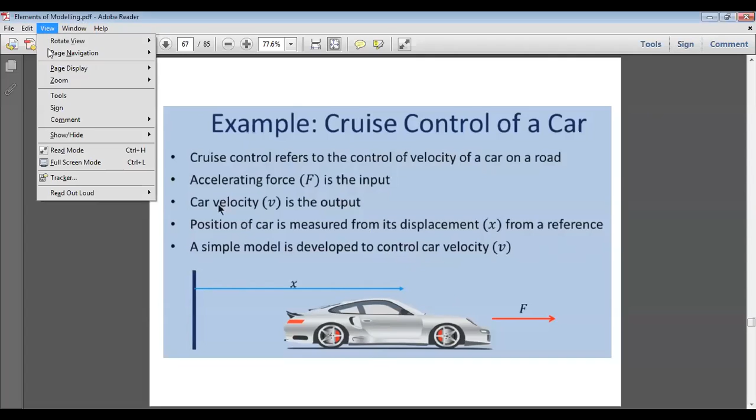Can you see a car here? Can you see a car? Are you able to see this slide? Yes sir. Another example: a cruise control of a car.

That means I want to control the speed of a car, let us say. So here I have a car, and as part of this control system, my interest is in evaluating the velocity. Now, when we say mathematical modeling of the system, let us recapitulate the steps we adopted.

First, we define the objective. What is the objective here? I want to measure the velocity of the car. I want to have an equation for the velocity of the car when some acceleration force F is applied. Let us see that in this particular diagram.

Here, F is a force generated from the engine, causing some kind of motion. Let us say, taking home as a reference, the car is moving. Now the car is at some position, which I am taking as displacement. In this diagram, the physical system called car has force as the input and displacement as the output, or I am interested in measuring the velocity.

Now let us write the mathematical equation for this mechanical system using this free body diagram. So the steps are: first, this is the original system. First, let us have a structure for this. When you see a structure, it looks something like this. Are you seeing this diagram where we are modeling the cruise control?

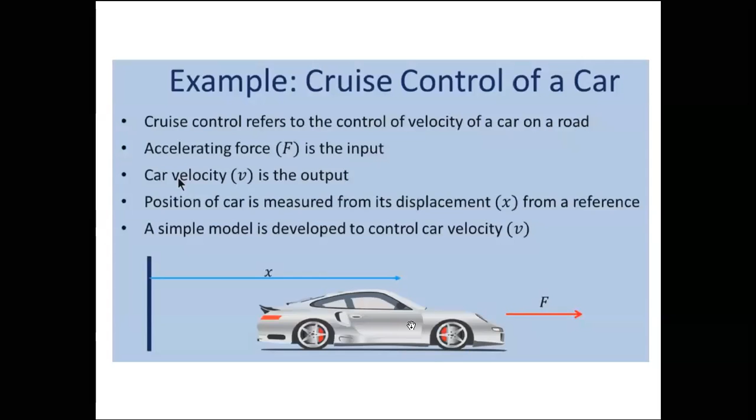This mass and the friction on the road or this air you consider, and let me represent here. This is my car mass equivalent. That's why it is represented with M. And subsequently, it is having some resistance, opposing force. So B is drawn. Now force is applied; in what direction is force applied? In this direction.

Now let us recollect the sequence of steps. If you recollect our earlier discussion, first we have to identify what is the scope or purpose of the model. Here I want to have an expression for velocity of the car, and subsequently I need to construct a model which will be giving the velocity of the car, which I can use for controlling.

Next, define the boundaries. When I say boundaries, what is your interest in that particular physical system? Here the physical system is the mechanical system. So here, what is your interest? I want to control the speed of the car, and there is some road. This is what the boundaries are. Road forms the part of the environment.

If you are expanding boundaries, what is going to happen is more and more forces, and in turn more and more elements are going to be added to that particular system, and in turn the system may become complex. So it is up to you to what extent you want to study the system. Based on that, the boundaries are going to be defined.

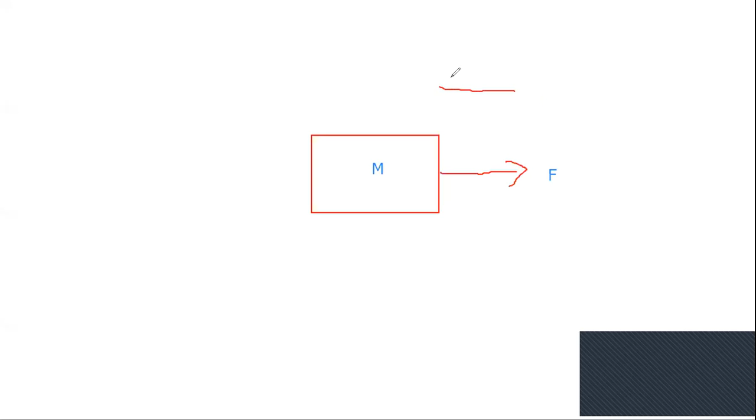That opposing force will be in this direction. What is this opposing force? This opposing force is because of this mass. That particular opposing force can be derived from Newton's second law. What is Newton's second law? F equal to ma, that is mass multiplied by acceleration. But what is acceleration? Rate of change in velocity, or rate of change of displacement.

So here I can have the expression d²x/dt², and its direction is in this particular direction. Next element is, we said that there is some friction here. At this place we have some friction, and that friction also opposes the force whatever you are applying. What is that friction? That is represented with your damping factor B.

Now here the displacement is x. Here you are having the displacement x, and some kind of opposition that is given by the mass, that is given by d²x/dt², and it is providing some friction. When you say the frictional force is proportional to the velocity, if you recollect, for the damper it is F equal to B into dx/dt.

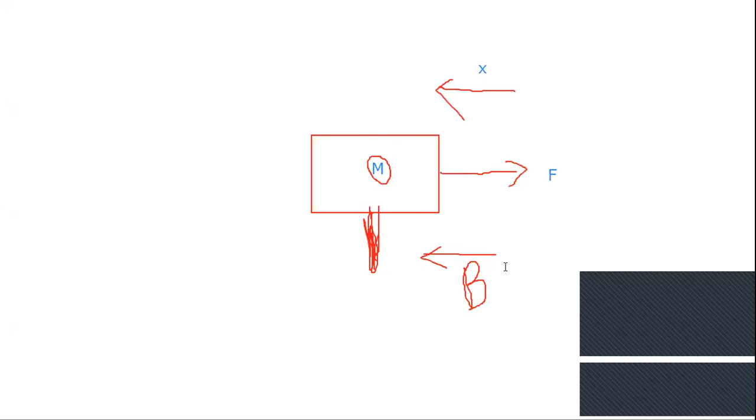Now let us come back to our earlier discussion. So if you see here, here I have mass and here I have friction, and if you write the equations, the first force is acceleration, that is given by m into d²x/dt². And the second one is frictional force, that is given by B into dx/dt.

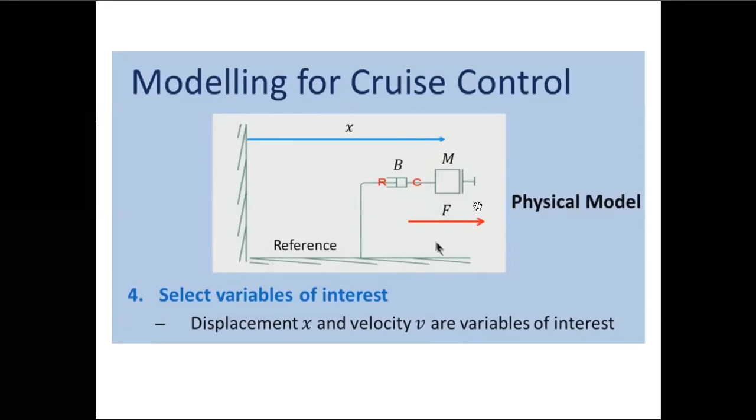So I can write F minus F because of M minus F because of B. Here, instead of M, it is represented as because of the acceleration: F minus FF, that is friction, minus FA equal to 0. This is the mathematical representation of a simple system.

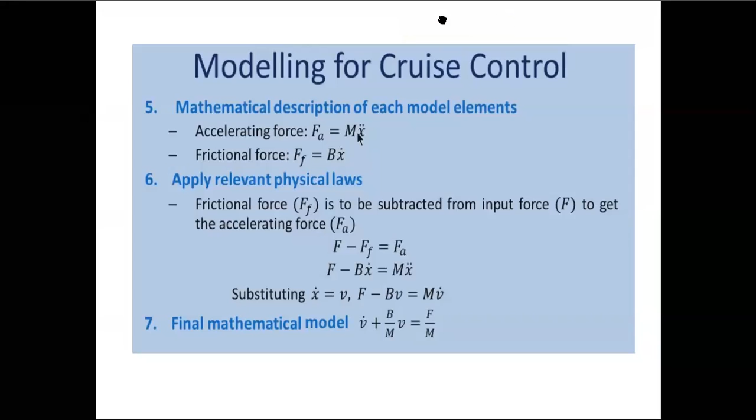I am pausing here. If you have any doubts, ask me. Is the process clear? Hello? Are the steps clear? Ajay. Ajay, unmute. Yes, sir. Yeah, steps are clear. Okay, sir. Clear. Sai Teja. Yes, sir. Is it okay? Yes, sir. Sivajyoti. Any doubts here?

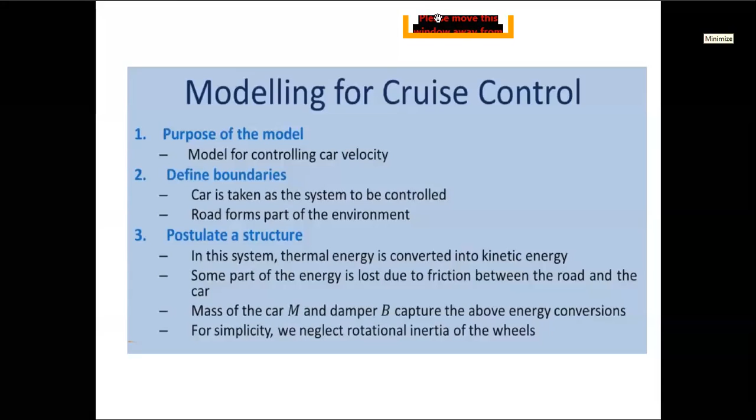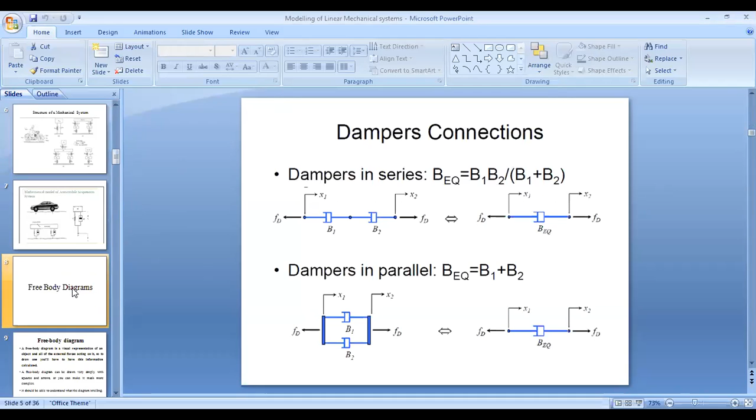No, sir. Okay, let us go back to yesterday's problem once again, so that we will establish more confidence. One minute. Can you see this slide? Mathematical modeling of mechanical systems. Are you seeing the PPT? Hello? Okay, thank you. Sir, in the previous problem, you explained applying relevant physical laws.

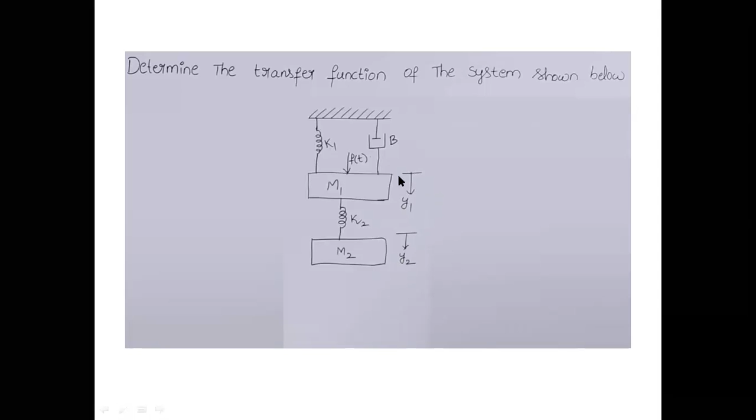Let me mark here. Let us say this is my 0 position. From here to here it is y1. From here to here it is y2. That is the meaning of displacement. That means this object has moved something. That's what y1 and y2 refer to. You need not take exactly this as a reference. From the initial position it moves some displacement.

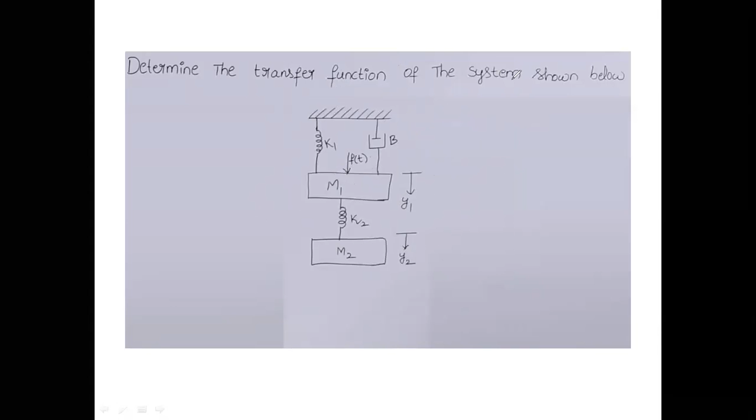Now, if I want a transfer function, first I need a mathematical model for this. For the mathematical model, first you identify masses, or the places where you have displacement, m1 and m2, and subsequently you write your free body diagram for mass m1 and mass m2.

What forces are acting on m1? You are pulling this down, that is f of t, whereas because of the spring it is pulling up, so that direction will be opposite to f of t. Similarly, as it is hanging down and this is pulling, the mass also will cause its force in the upward direction. Suppose you push a person, he tries to stay standing, so he will be resisting that force. So the force because of the mass also will be opposite to f of t.

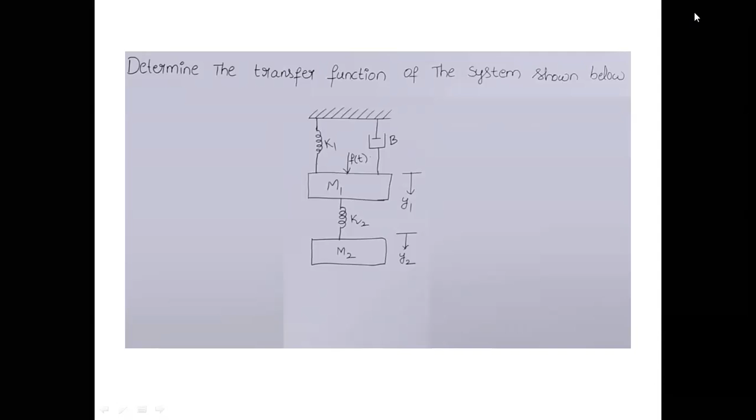Now let us see that in the next slide. If you see here, f of t is away from this body, whereas what is fb? Because of damping, it is in the opposite direction to ft. Similarly, what is fk1? A spring between the reference and mass, that also will be opposite to ft. When you pull, the mass will be opposing, so its direction is also opposite.

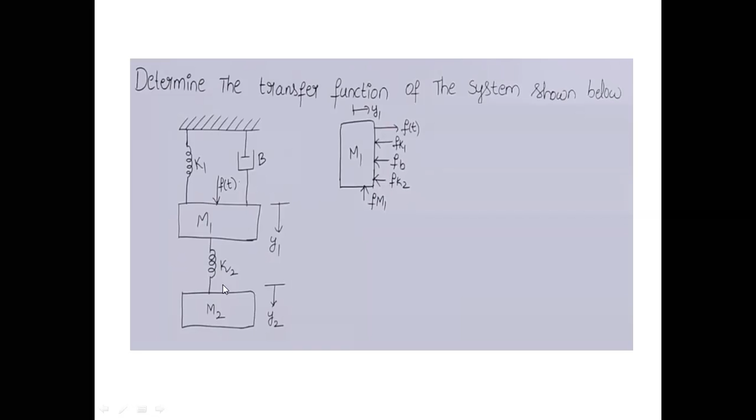Here fm1 is placed below, but even you can take it here and it will be inside. Coming to this, there is a spring between m1 and m2, some effect will be there, and that effect is shown here. Now let us have the equation. fm1 means due to mass, d square y1 by dt square. What is fb here? Damping depends on velocity.

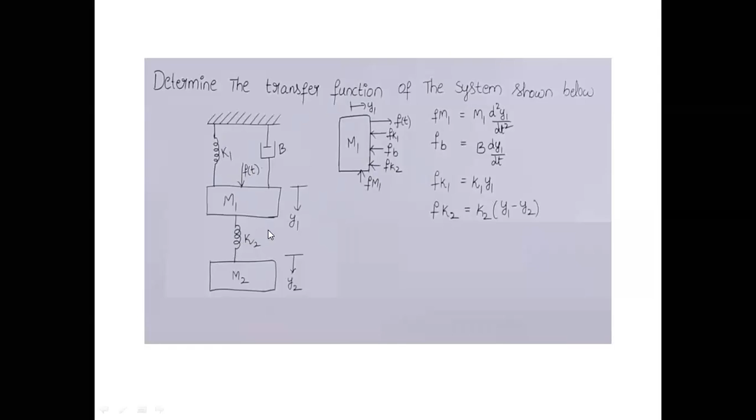In this spring, one end is rigidly fixed. In this side, this spring is not rigidly fixed. The meaning of this is, see this diagram once more. Give me 1 minute.

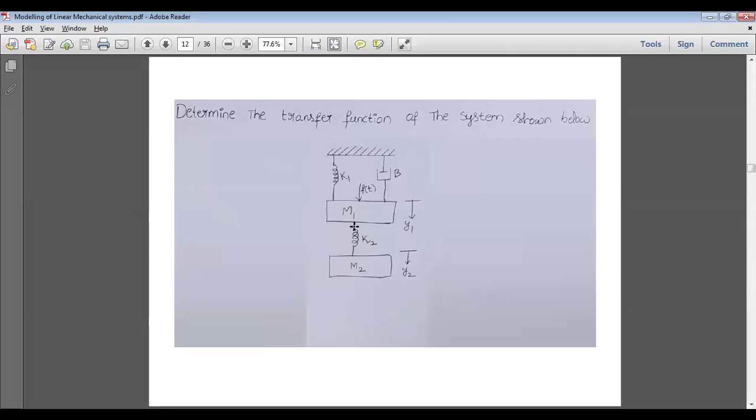Did you understand the difference? In this case the spring is tightly fixed at one end, the other side is free. But in our problem, if you observe here, 1 minute. If you observe here, it is tied to both. That means the spring can move. It can give some force. Is it okay? So here that particular effect is taken as K2 into y1 minus y2, this displacement.

Now let us write this D'Alembert's principle. D'Alembert principle says that the forces acting on a body and the forces resisting the motion of that particular body will be equal. That means f of t will be equal to, what are all resisting here? F of t will be equal to fm1, fk1, fb and fk2. That's the equation we got here.

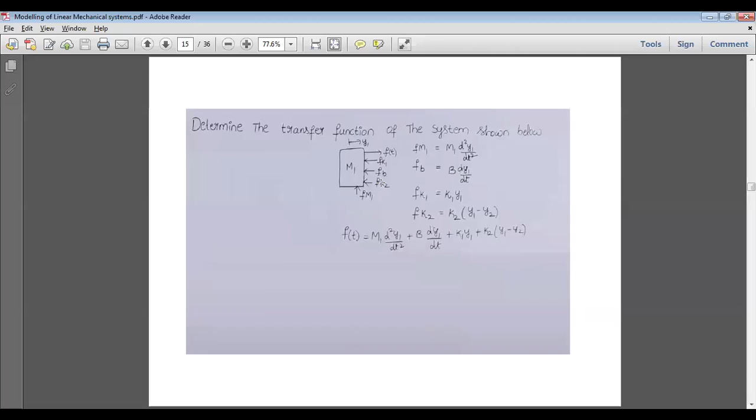F of t is acting. What is opposing? m1 d square y1 by dt square, because of the mass. Because of the damping or friction, B into dy1 by dt. Because of the displacement of the first spring K1, it is K1 into y1. Because of the second spring K2, some force is created on M1. So K2 into y1 minus y2.

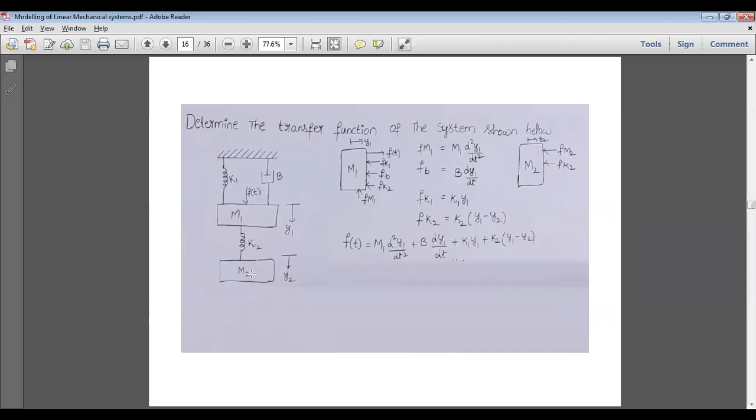Same thing if you write for the next one, that is M2. On M2 there is no force, only the spring, but it is having its own mass. So both will be opposing the motion. That's why FM2, FK2. Now let us write the equation: M2 into d square y2. What is y2? Displacement. What is FK2? Displacement on M2. So these two are equal. Is there any force that is acting? No. Only opposing forces, and you will be getting this equation. If you write down these two equations combined together, this will be the mathematical representation of my system.